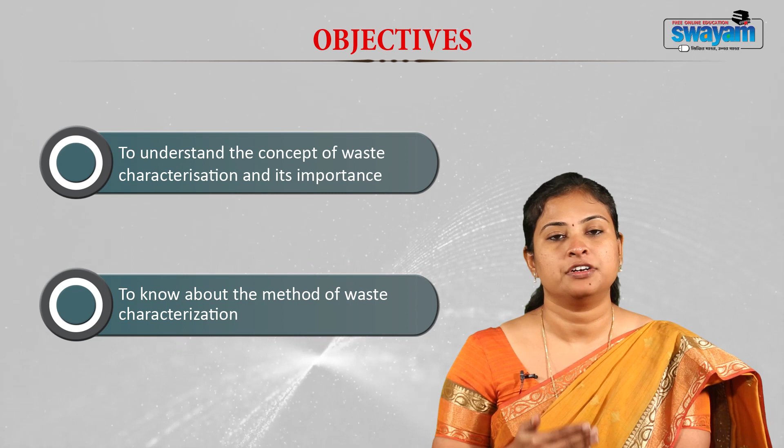Now, the learning objectives of this module include to understand the concept of waste characterization and its significance. Then, to know about the method of waste characterization. Now, as I told you earlier, waste characterization is essential because waste contains a lot many components in them. It is a commingled or a mixed sort of waste where you have the biodegradables, plastics, cardboards, metal, glass, paper and many other inert material like dust, silt, sand and so on. Now, when you characterize, this again gives you the property of the materials which is there in the waste stream.

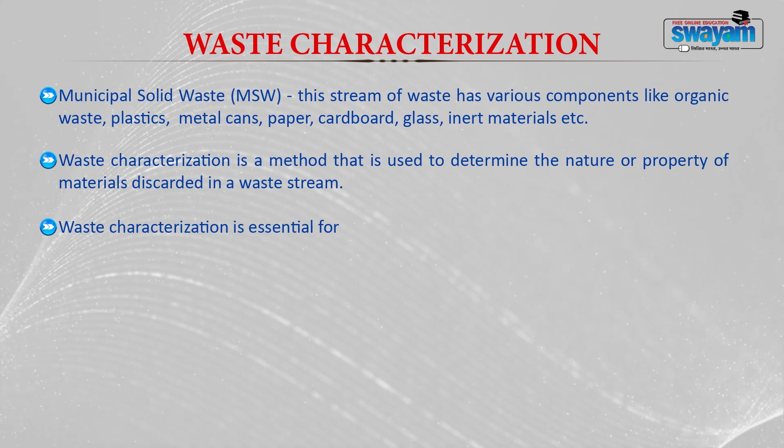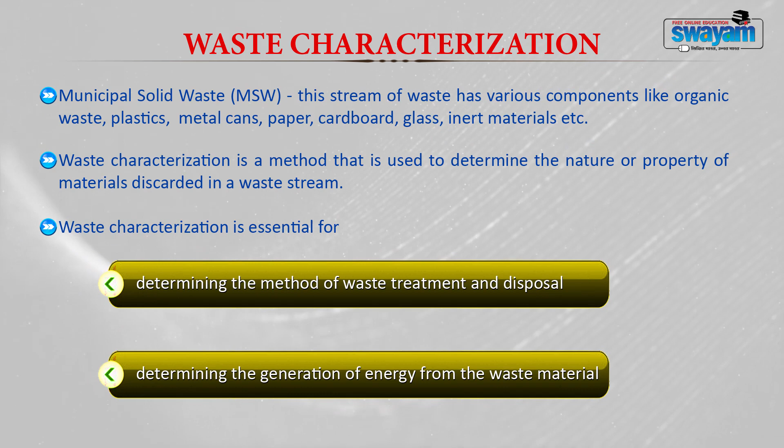Now, as I told you earlier, again why do we do this characterization? One is to determine the method of waste treatment and disposal, and second to identify or determine the energy generation aspect of the waste material. Now, there are three different types of characterization which is done. One is physical characterization, second one is your chemical characterization and the third one is your biological characterization. Now, we will discuss each one in detail.

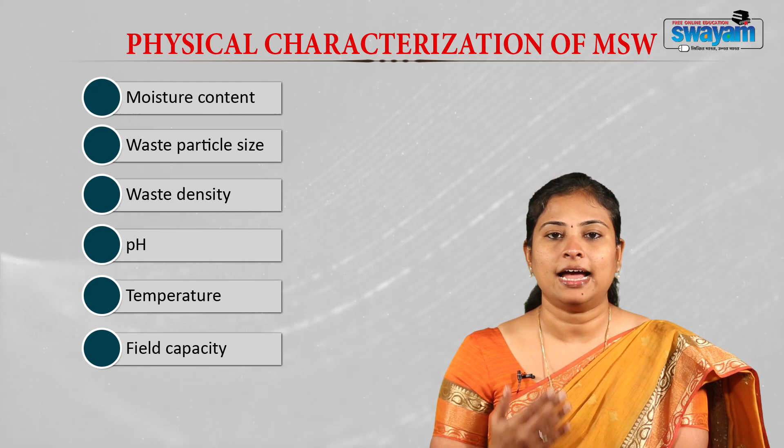Now, the physical characterization includes parameters like identification of your moisture content that is present in your waste material, the particle size, waste density, their pH, temperature, field capacity, porosity and permeability. The characterization is important and it will help you identify the extent and the rate of degradation that the waste might undergo. So, let us discuss about the moisture content.

Now, the moisture content of a solid waste is nothing but the weight of moisture per unit weight of dry or wet material. In the wet weight method, the moisture is generally expressed as percentage and in the dry weight method, it is expressed in terms of percentage of the dry weight of the material. In the wet weight method, the moisture in the sample is expressed as percentage of wet weight of the material, while in the dry weight method it is expressed as a percentage of dry weight of the material.

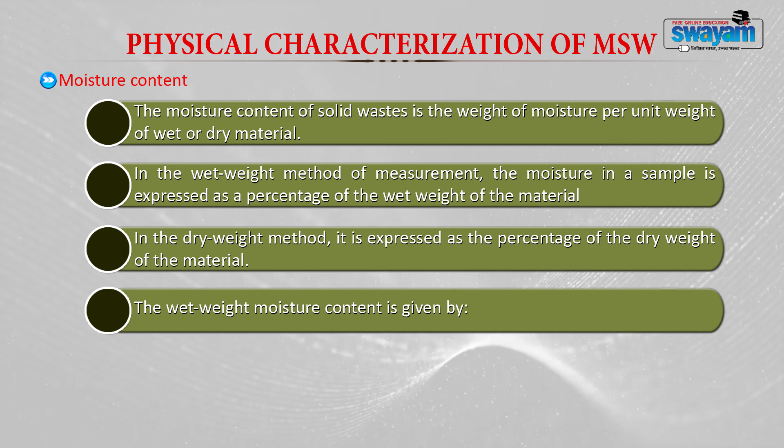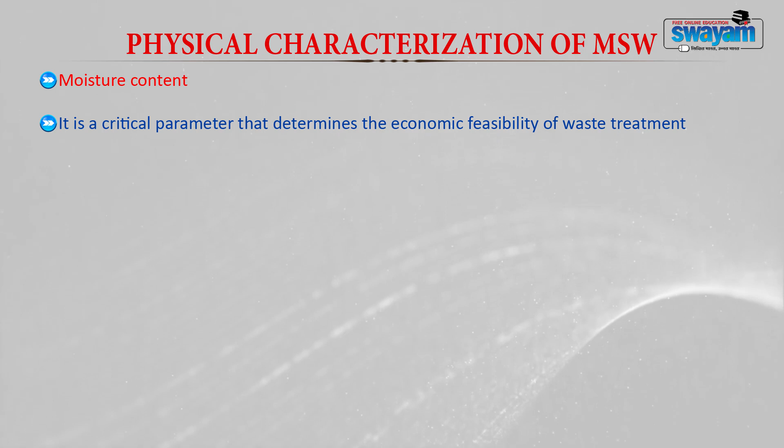Now, the wet weight moisture content is given by the formula moisture content = (A − B) / A × 100. A is nothing but your initial weight and B is your final weight, and when you subtract the final weight from the initial weight and you divide it by the initial weight into 100 will give you the moisture percentage which is present in the sample. Now, moisture is one critical parameter. It helps you in identifying what type of process you have to choose for the treatment of this municipal solid waste. So, moisture is a critical parameter that determines the economic feasibility of waste treatment.

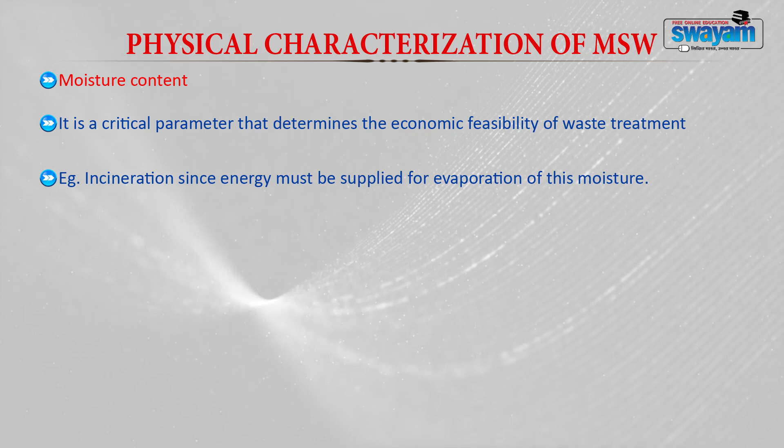Example, you can talk about incineration. Now, incineration is a process of waste treatment where your waste is combusted at a very high temperature in the presence of oxygen. Now, when you are combusting, you have to apply a lot of heat to burn the waste. Now, if you have more moisture content in them, you have to apply the temperature accordingly. So, in that case moisture content plays one important role. In addition to that, while processing also moisture content is very important. For example, if you are going for volume reduction by compaction, if you have too much of water in the waste, it will ooze out.

And another way by which moisture content is important: when you choose the biological conversion route like composting or anaerobic digestion, moisture content is very essential, because these processes require some amount of moisture, which will be supplied by the solid waste. What I mean to say is, if the moisture content is already present, then you do not have to add it externally. Okay. So, in general, municipal solid waste contains around 20 to 40% of moisture.

Now the moisture present in the waste depends upon the climatic condition of a particular region. If the waste is collected from an arid climate, it will be dry, and if it is collected from a region where there is high precipitation, then it will have more moisture.

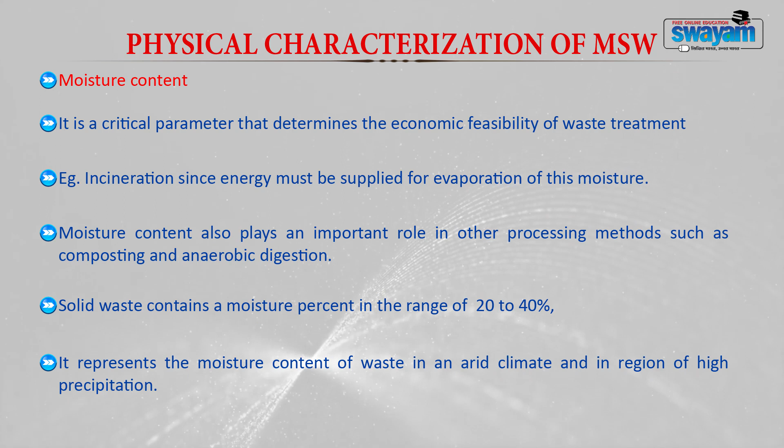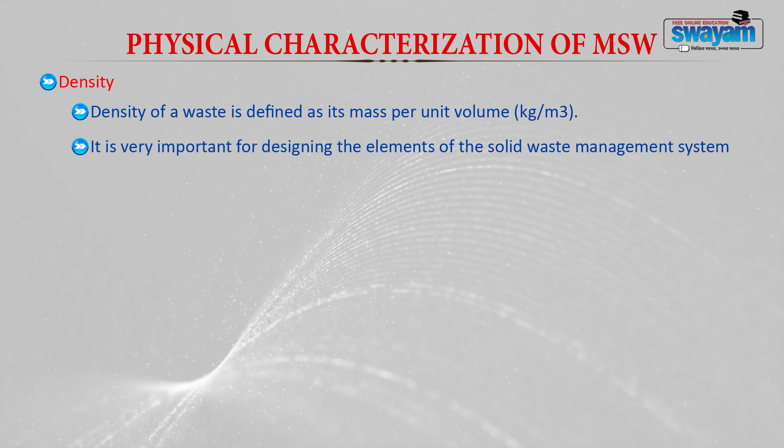Next important parameter is density. Density of a waste is defined as its mass per unit volume, which is generally expressed as kilogram per meter cube. It is an important parameter for designing a number of elements in a solid waste management system. In the previous module we discussed waste collection, and how it is one important component of a solid waste management system. So density is very important for designing the elements of a solid waste management system.

In waste collection, you decide the type of waste collection vehicle. To choose it, you should know the density. Also, the storage container, what its size should be, how you are going to transport, everything depends upon the density. So once you identify the density of the waste, you can easily choose the collection vehicle, storage container and the means of transportation.

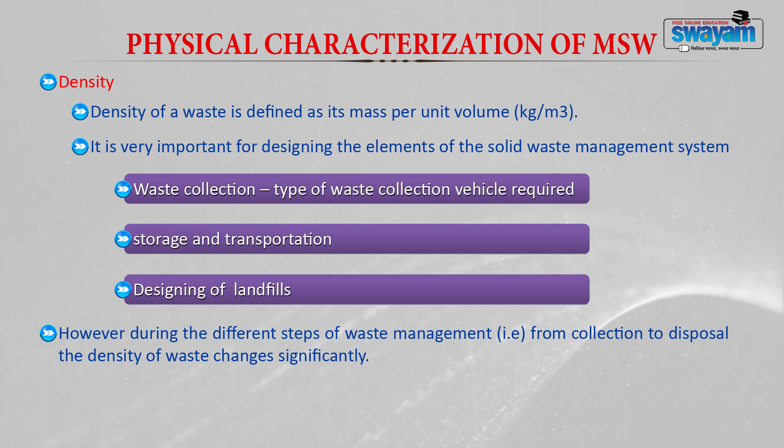Even while designing landfills, which are nothing but a controlled environment where you contain or store the waste so that it does not pollute environmental matrices like air, water, soil and so on, density has to be taken care of. During the different steps of waste management, from collection to disposal, the density of the waste keeps changing. So at every point of time, you should know the actual density of the waste.

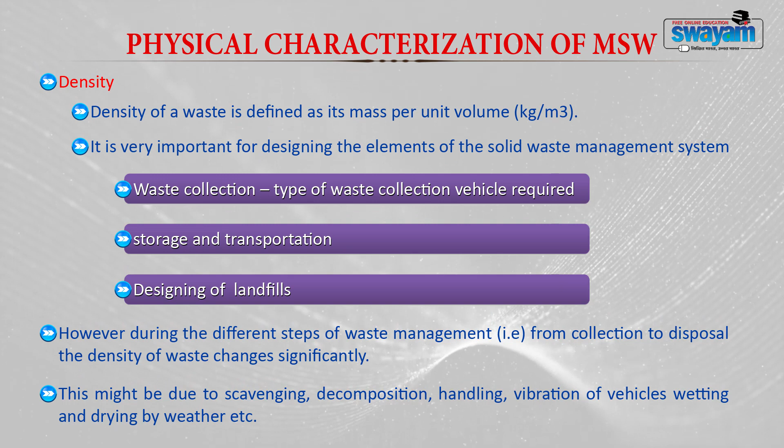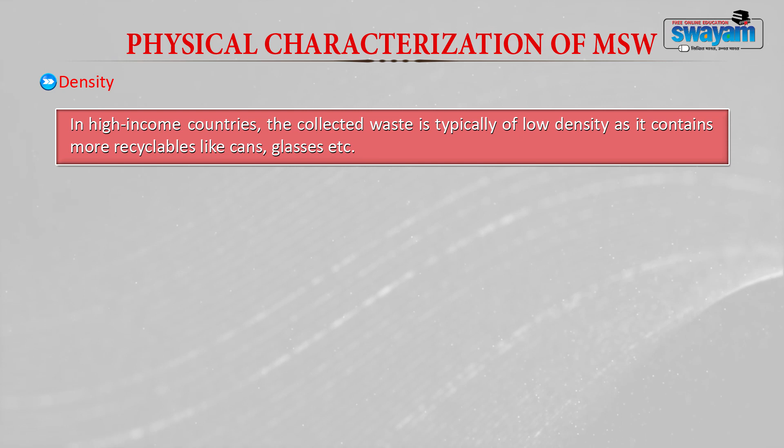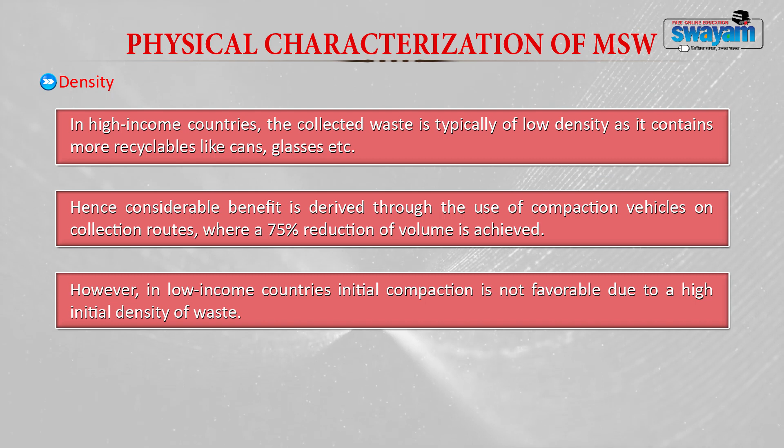In a high income country, the collected waste will typically have low density because it contains more recyclables, for example cans, glass, paper and so on. In that case, you get a considerable benefit from the use of compaction vehicles on collection routes, where a 75% reduction of volume is achieved. In low income countries, initial compaction is not favorable because the density is already very high. Compaction vehicles offer little or no advantage, and it is not a cost effective option.

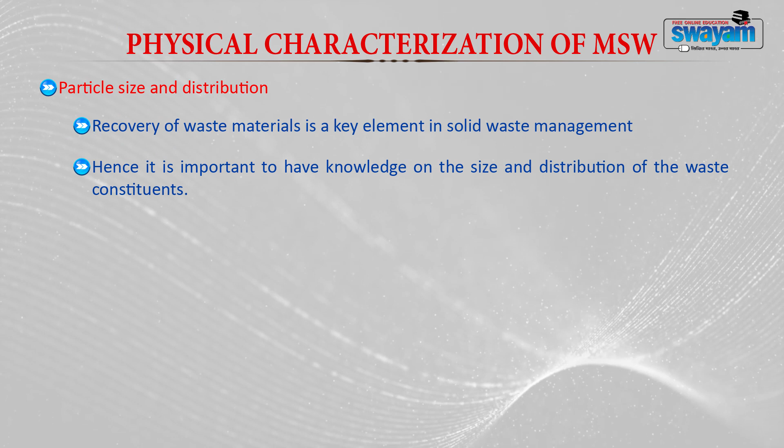Next comes particle size and distribution. This plays an important role when you plan to recover certain materials from the waste. Recovery of waste materials is a key element in solid waste management, and for this the size and distribution plays a very important role. It will also help in selecting the waste processing method, for example what type of separator to use, whether magnetic separation or air classifiers, and what type of shredders, whether shredding, grinding, or crushing. All these things are determined by particle size and distribution.

Now the particle size and shape of municipal solid waste is really challenging to measure. Due to their complex shape and movement, it is generally very difficult to sieve. You all know that particle size is conventionally identified using a sieve analyzer. But the waste as such is of different shapes and sizes.

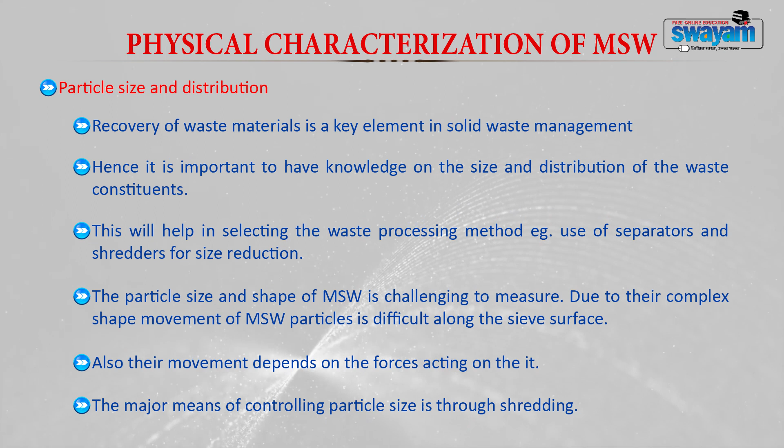So, in that condition, it becomes very difficult for the material to get sieved out through the sieve analyzer. Also, the movement of these waste materials through the sieve depends on certain forces acting on it. Now, the major means of controlling particle size is only through shredding. If you do shredding, you will have a uniform particle size, and shredding has a lot of advantages also.

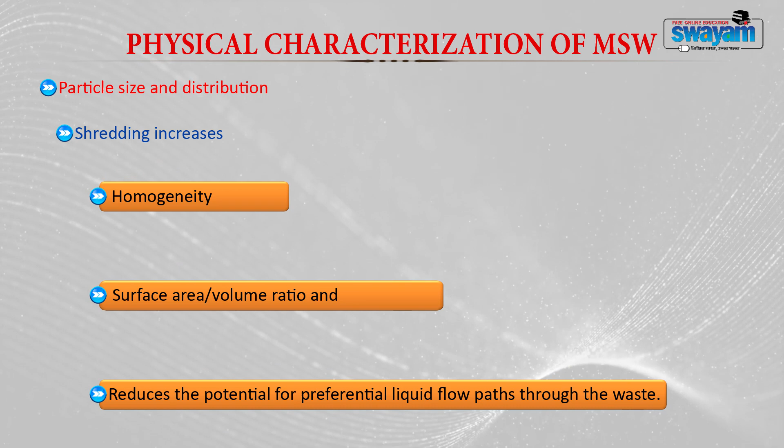When you do shredding, first, it will increase your homogeneity. Second, it will increase your surface to volume ratio. Then it will reduce the potential for liquid flow paths through the waste. Particle size will also influence your waste packing densities, so you can find a uniform packing density to a certain extent.

The particle size reduction done by shredding can also favor more gas production and better composting when you choose the biological conversion route, because with uniform particle size the surface area increases and the bacteria can act more efficiently. They can produce more biogas when you apply anaerobic digestion, or provide better or faster composting when you apply composting as a treatment process.

Now, it also has another side. The flip side of size reduction with shredders is that smaller particles generally allow higher packing density. When it is tightly packed, the movement of water decreases. Moreover, it becomes difficult for the bacteria to access the substrate for its food requirements. Therefore, the particle size should always be known to choose a better treatment method.

The next important physical parameter is the field capacity. Field capacity is a critical physical parameter, and it is nothing but the amount of moisture that is retained in the waste sample against the action of gravitational pull. For example, any material will have some holding capacity. After that, the water keeps oozing out of that material. The same thing is applicable here also.

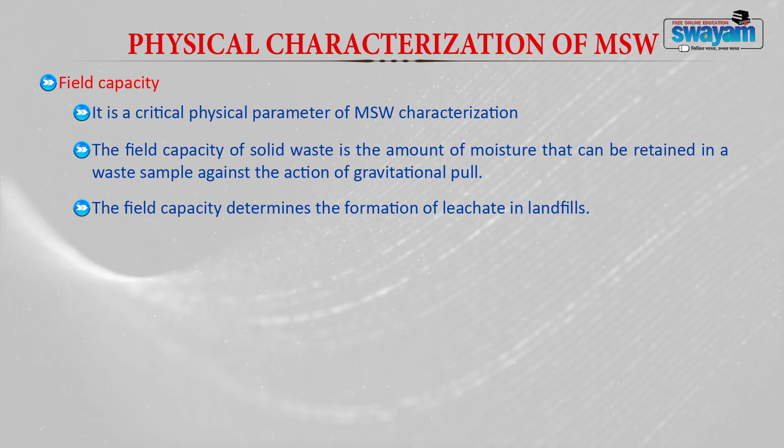The waste as such will have some amount of moisture and retain it, but once it starts degrading, it will release a lot of water, and the water cannot stay in the material and oozes out. This is called your field capacity. The field capacity determines the formation of leachate in landfills. The water in excess of field capacity will always be released from the waste material as leachate.

In addition, the release of water from the waste is also influenced by the applied pressure. If you apply pressure over the waste material, the water will ooze out, and, as I told you, decomposition also favors the oozing out of more leachate from the waste. The field capacity of uncompacted commingled waste from residential and commercial sources generally ranges from 50 to 60%.

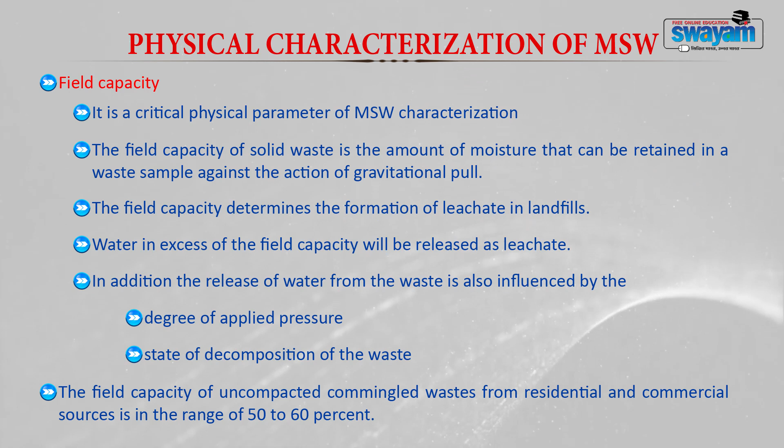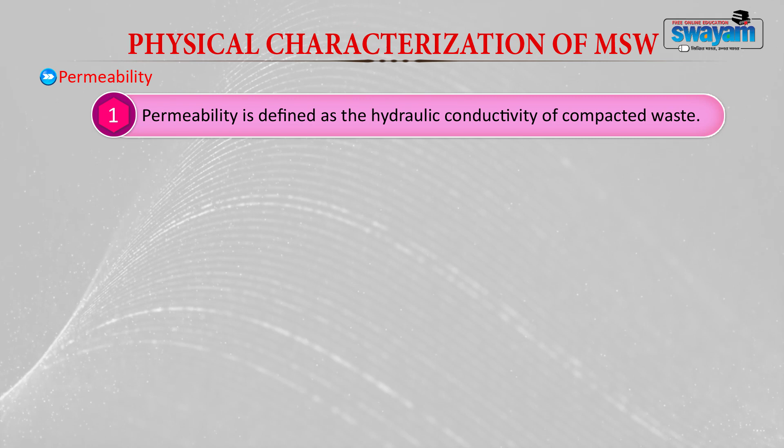The next important parameter is permeability. Permeability is defined as the hydraulic conductivity of compacted waste. It is an important physical property. The movement of liquid and gases within the landfill is determined by the permeability of the waste. It depends on factors like pore size, surface area, and pore size distribution. Generally, permeability is inversely related to density: the more the density, the more the movement is restricted, so denser refuse is less permeable. The permeability of refuse ranges from 10^-1 to 10^-5 centimeter per second.

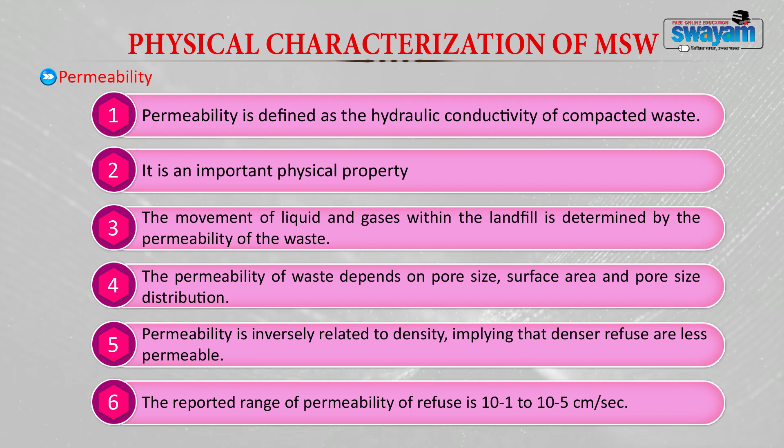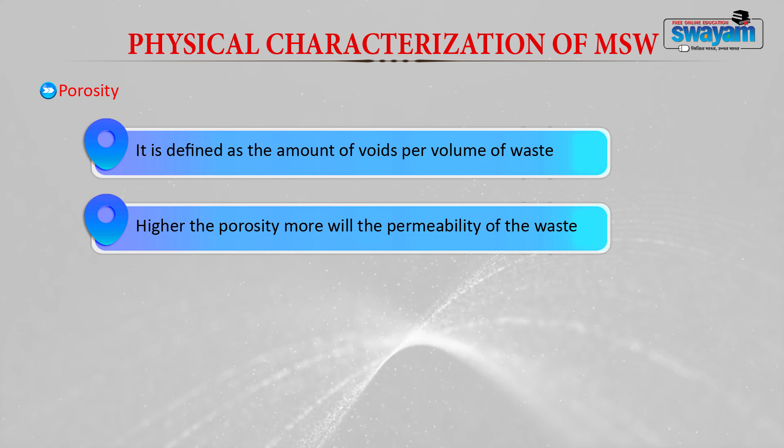Another important parameter in the physical characterization of waste is porosity. It is defined as the amount of voids per volume of waste. The higher the porosity, the more the permeability of your waste, and the porosity of waste generally ranges from 0.4 to 0.67. Porosity changes when you do compaction. When you densify or press your waste, the pores or void spaces are lost, so porosity depends on compaction as well as on the composition of waste.

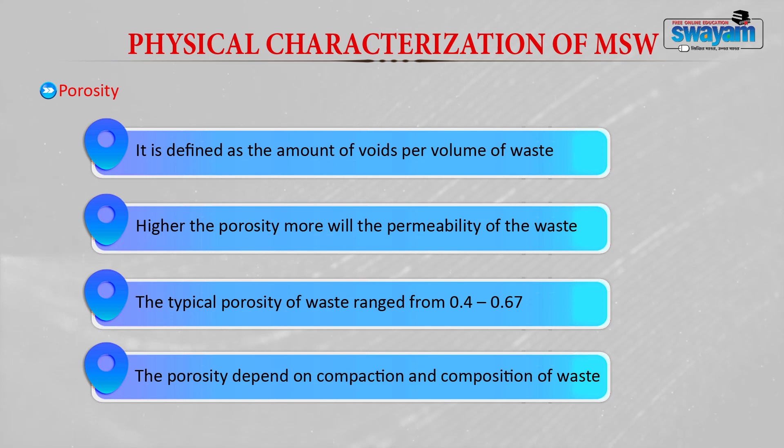Take composition of waste as an example. Inert materials like street sweepings have a lot of sand and silt, and there the porosity will be high. But for plastics or papers, the porosity will be a little less.

Now, in the previous section, we discussed the importance of waste characterization, and we discussed many parameters of physical characterization like porosity, permeability, particle size, pore size distribution, then moisture content, field capacity and so on. Now, we will be discussing the chemical characterization of waste.

Just like physical characteristics, chemical characteristics are also very essential. So, let us discuss the different chemical characteristics. Chemical composition of solid waste is very important, because it determines the alternative processing and recovery options available for the waste material. Especially in the waste to energy process, where waste is used as a fuel, chemical analysis or chemical characterization plays a greater role.

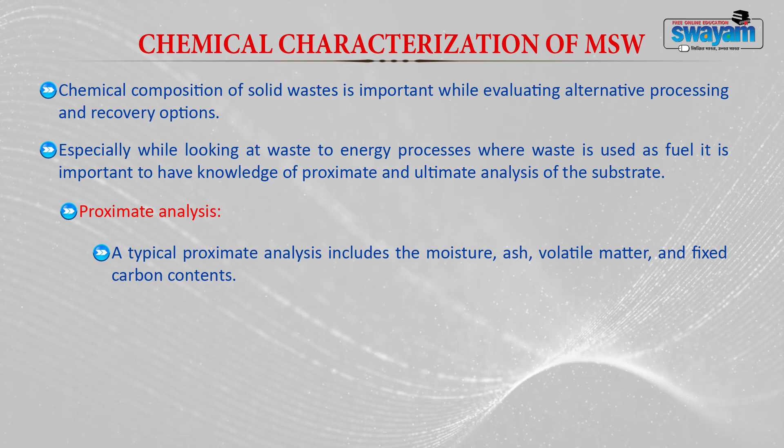In such conditions, you need a proximate or an ultimate analysis of the substrate. If you have a proximate and ultimate analysis, then you can identify the energy potential of a particular waste material. Now, let us see what a proximate analysis is. Proximate analysis includes the analysis of the moisture content, ash, volatile matter and fixed carbon contents.

Moisture content we have already discussed. How will you perform this? You take the sample; it is identified by drying 1 gram of sample at 105 degrees Celsius for 1 hour. The weight loss is expressed as a percentage of the initial weight of the sample. Moisture percentage is the weight loss divided by the total weight of the sample into 100.

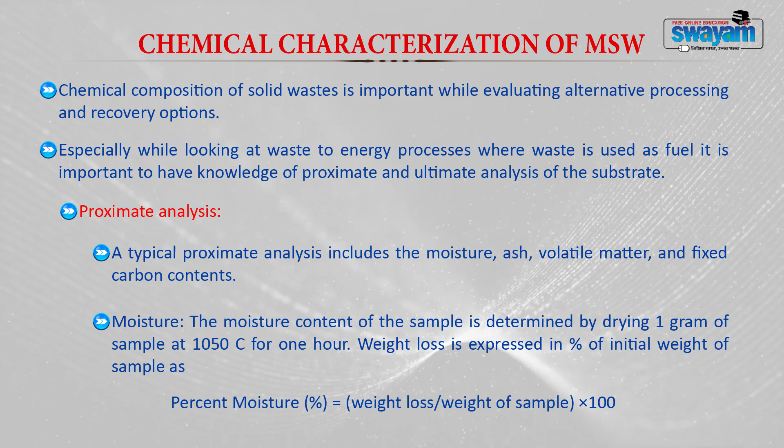The next one is volatile matter. Volatile matter is the amount of waste converted to gases as a result of combustion. It is the weight loss obtained on heating 1 gram sample at 950 degrees Celsius for 7 minutes in the absence of air. Here the weight loss due to the volatile organic matter is given by total weight loss minus the moisture percent. So, volatile matter percentage is the weight loss due to volatile matter divided by the weight of the sample into 100.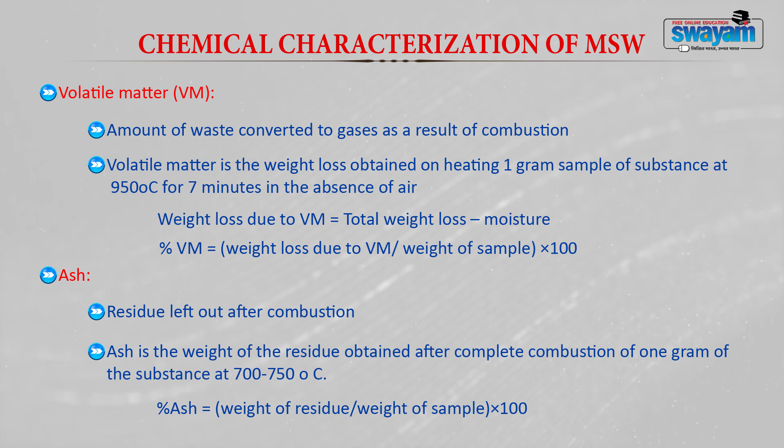The next important parameter in proximate analysis is the ash content. Ash is the residue left after combusting a specific weight of the waste material at 700 to 750 degrees Celsius. Ash percentage is given by the weight of residue divided by weight of the sample into 100.

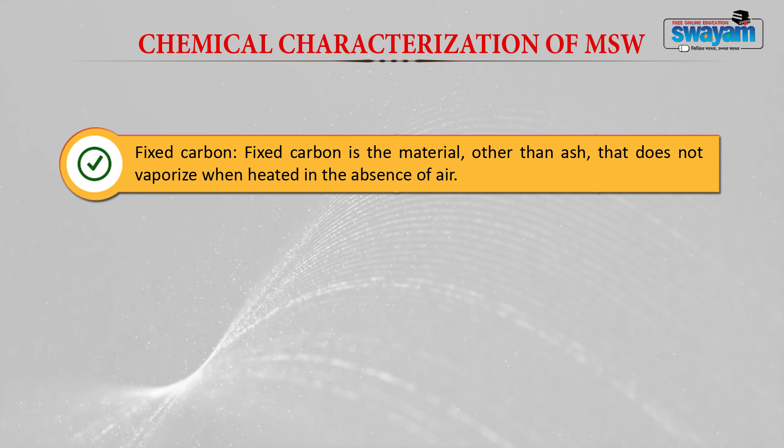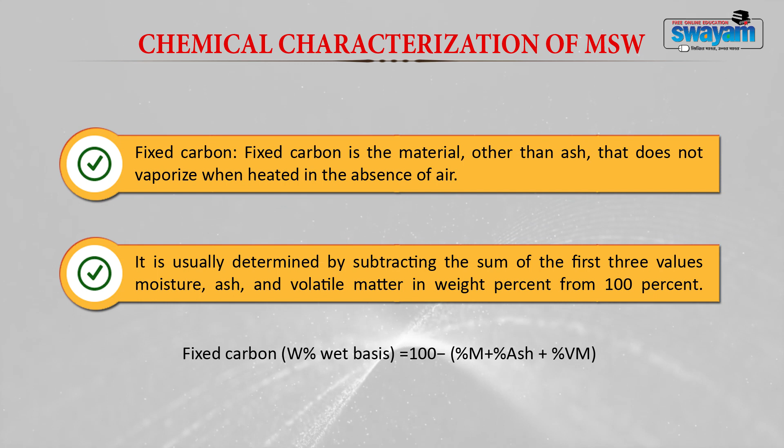Next parameter is fixed carbon. Fixed carbon is material other than ash that does not vaporize when heated in the absence of air. It is usually determined by subtracting the sum of the first 3 values, that is moisture, ash and volatile matter in weight percent, from 100. That means fixed carbon is 100 minus the sum of moisture, ash and volatile matter.

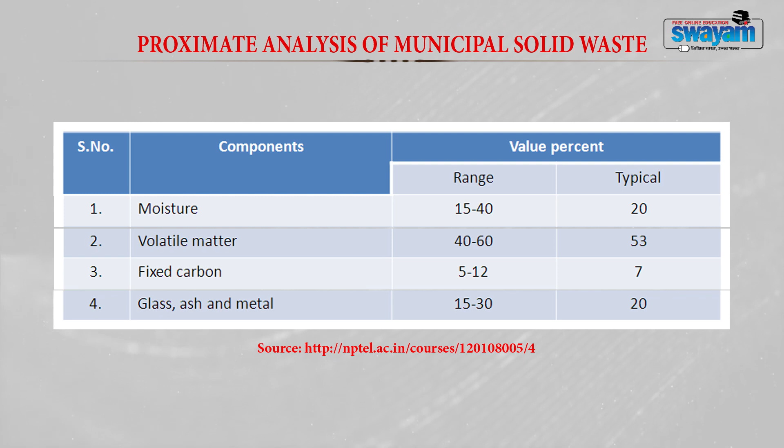This table provides the proximate analysis of municipal solid waste. A typical municipal solid waste contains a moisture content of 20%, volatile matter of 53%, fixed carbon of 7% and glass, ash and metal of 20%. Another parameter is the fusing point of ash, defined as the temperature at which the ash from burning waste forms a solid clinker due to fusion or agglomeration. Generally the fusing temperature for clinker formation is 1100 to 1200 degrees Celsius.

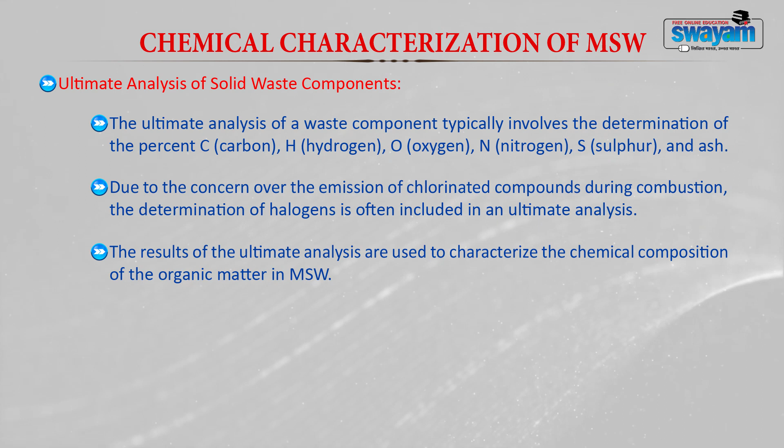So far we discussed proximate analysis. Now we will see the components of the ultimate analysis. There are many components, like carbon, hydrogen, oxygen, nitrogen, sulfur and ash. Due to the concern over emission of chlorinated compounds during combustion, the determination of halogens is also included in the ultimate analysis. The results of ultimate analysis are generally used for characterizing the chemical composition of the organic matter present in municipal solid waste.

They are used to define what is a proper mix of waste material to achieve a suitable carbon-nitrogen ratio, especially when you use a biological conversion route for treating your waste. Biological conversion route means, for example, composting, biogasification, anaerobic digestion, vermicomposting and so on.

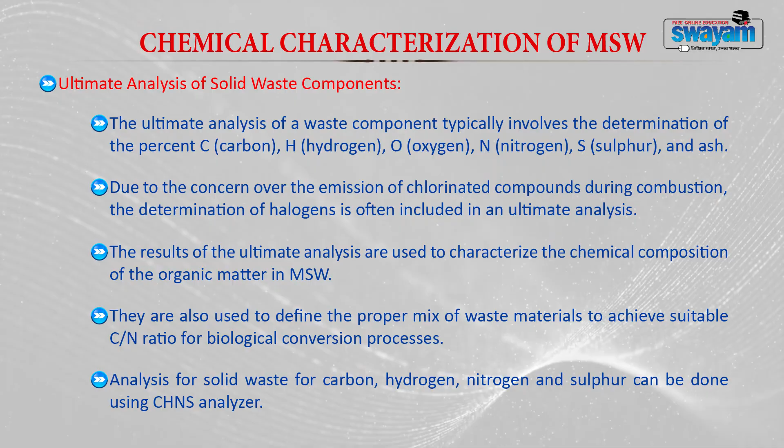Now, the analysis of carbon, hydrogen, nitrogen and sulfur is generally done using a CHNS analyzer, and ash is determined by the method mentioned in the proximate analysis, by heating at a temperature of 700 to 750 degrees Celsius, which results in the formation of ash, and then you can quantify that to get the ash content. Now, the next chemical parameter is the heat content.

Why do we have to calculate the heat content? It gives the calorific value of the waste material. When you know the calorific value, you can understand the energy potential that is locked in each particular waste. Calorific value is defined as the amount of heat generated from combustion of a unit weight of a substance. It is generally expressed in kilocalories per kg.

The calorific value is generally determined using a bomb calorimeter, which is the heat generated at a constant temperature of 25 degrees Celsius from combustion of a dry sample. Since this test temperature is below the boiling point of water, the combustion water remains in the liquid state. During combustion, the gases remain above 100 degrees Celsius, so the water resulting from combustion is generally present in the vapor state.

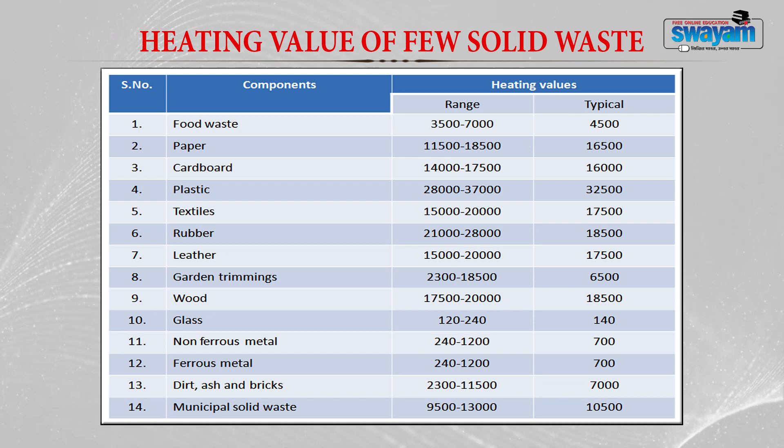Now, this table gives the heating value of some solid waste materials. For example, the heating value of food waste is around 4500 kilocalories per kg. For paper it is 16,500, plastic 32,500. Likewise, it is listed for cardboard, textiles, rubber, leather, garden trimmings, wood, glass, metal, ferrous and non-ferrous, dirt, ash, bricks and municipal solid waste. Plastic contains the highest heating value, 32,500 kilocalories per kg, and the lowest is in glass, and municipal solid waste, the commingled or mixed waste, contains around 10,500 kilocalories per kg.

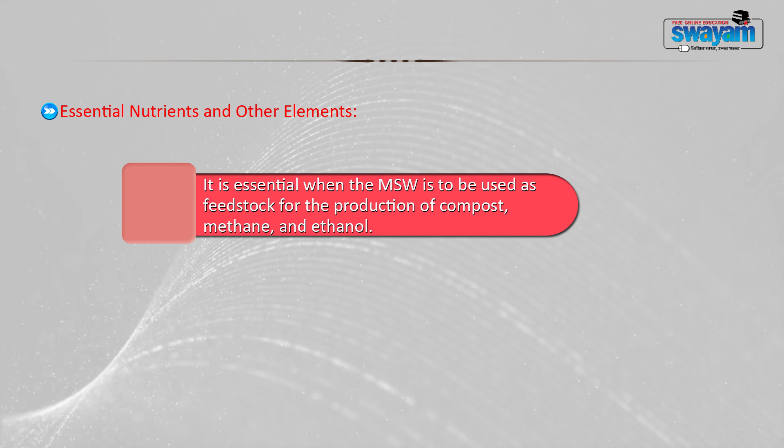The next parameter under chemical characterization is essential nutrients. Essential nutrients are analyzed to find out the nutrient level present in the waste material, so that it can support the growth of microorganisms. It is essential when you are going to use this waste material as a feedstock for the production of compost, methane, ethanol and so on.

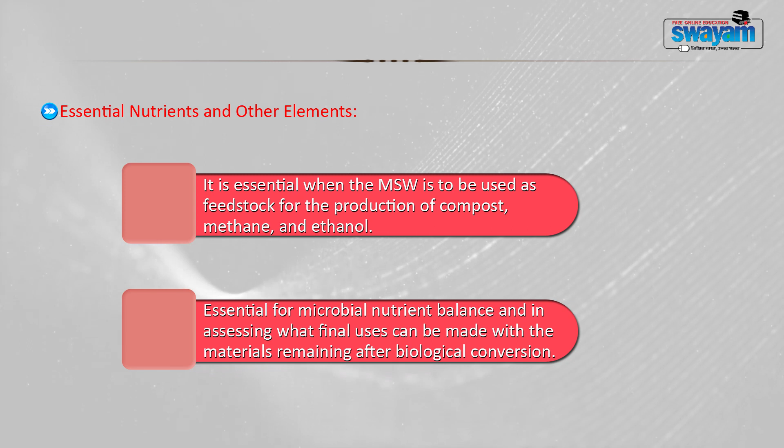When you identify these elements, that will help you know whether this will support microbial growth or not, and whether you can prefer the biological conversion route. This data is obtained when you characterize the essential nutrients present in the solid waste. Biological characterization is nothing but identifying the organic fraction present in the waste. It will help you identify the biological conversion route to suggest for the waste generated in your locality.

To summarize, in this module we have discussed what characterization is and why waste characterization is important. When you understand the properties of the waste material, you can identify the nature of treatment for it and decide how to dispose of it. Moreover, you can identify the energy potential locked in the waste. Then I told you there are three different characterizations of waste.

One is physical characteristics, under which we studied moisture content, permeability, porosity, particle size distribution and so on. Then we discussed chemical characteristics: heating value, ultimate analysis, proximate analysis, and their components. We also discussed the fusing point of ash. Lastly, we discussed the significance of waste characterization, based on which you can choose a biological conversion route or go for another thermal treatment method.